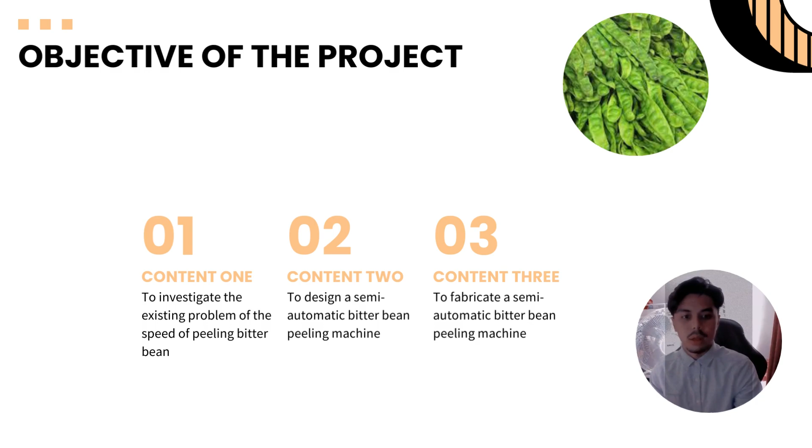The objective of this project is, first, we need to investigate the existing problem of the speed of peeling bitter bean. Second, we need to design a semi-automatic bitter bean peeling machine. And third, we need to fabricate a semi-automatic bitter bean peeling machine.

Next is the scope of the project. This project is aimed at entrepreneurs who sell bitter beans as the main production product, and the designs are created by using a solid modeling computer design program.

The third point is overall rough dimension of the product are 30 cm length, 20 cm width, and 15 cm height. The fourth point is estimated weight of the product is 3 to 5 kilogram.

The product can be used in small industrial areas or at home, and it is not suitable in watery places.

The fifth point is only one pod of bitter bean for one entry. The bitter bean must not exceed the specified width limit, which is 20 cm.

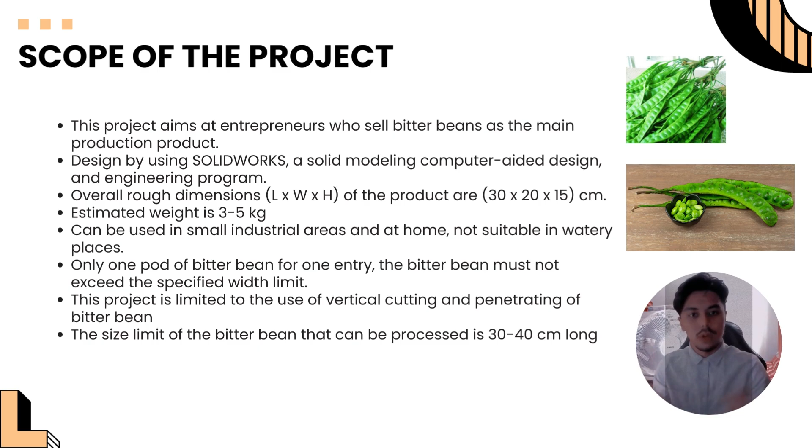This project is limited to the use of vertical cutting and penetrating of bitter beans. The last point is the size limit of the bitter bean that can be processed is 30 to 40 cm long. So the next slide is significance of study.

By researching and investigating the way small industries and common people peel the bitter bean, there are problems found, such as the way the bitter bean is peeled. Firstly, the way the bitter bean is peeled is not efficient enough as they are peeled manually by using their own hands. By using the product that we created, it is possible to shorten the time for processing of the bitter bean peeling to occur in a short time and a simple way.

Therefore, we created a new initiative, which is to create a semi-automatic tool that is able to peel off the skin of the bitter bean, to achieve our goals such as time saving in the peeling process. It is also able to save the cost of purchasing ready-to-peel bitter bean from a supplier.

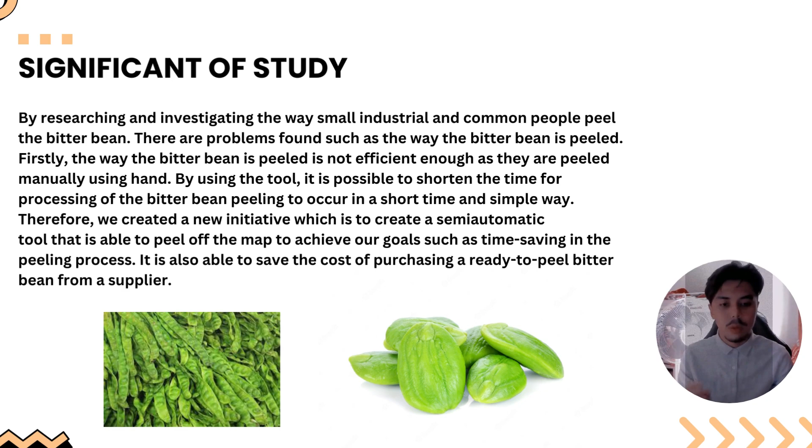Among the side dishes in Malaysia is bitter bean, or Parkia speciosa as it is scientifically known. In addition to the Parkia speciosa type, Malaysia is also home to the Parkia timoriana type of bitter bean. The filling of the bitter bean of the Parkia timoriana type is really tasty and is the second choice for cooking.

Parkia speciosa is more widely used and loved by the community in Malaysia. It serves as the base for a variety of bitter bean based dishes, including bitter bean anchovy sauce, fatty bitter bean sauce, and others. It makes it easy for those who don't have much time and are always busy at work and don't have time to prepare and buy ingredients for their own meal.

Bitter bean based food is one of the dishes offered as a ready-to-eat food product. Next, small and medium industry, or in Malay, industri kecil sederhana, also known as IKS, is a government initiative to develop rural industry in Malaysia.

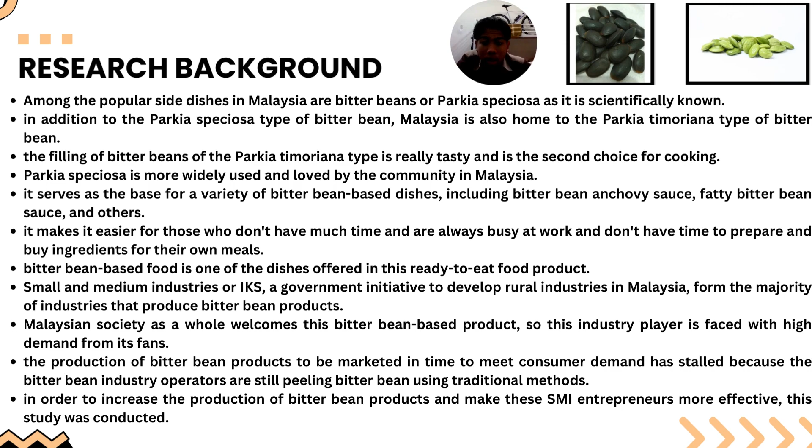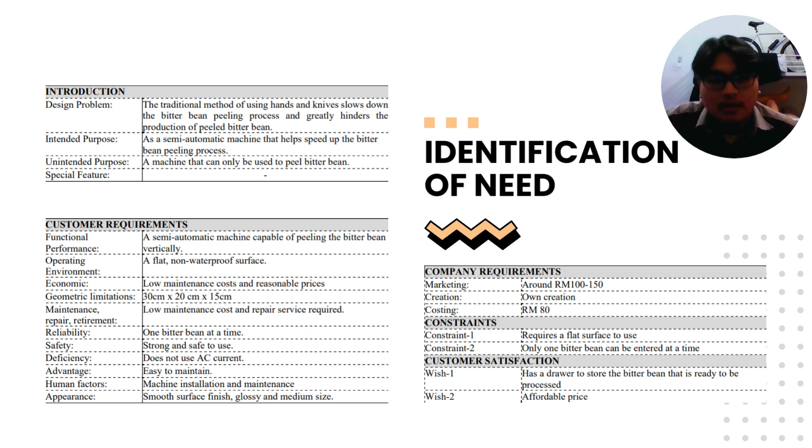Next, I will present about identification of need. Identification of need is divided into 5 parts, which is introduction, customer requirements, company requirements, constraints, and customer satisfaction.

So for conceptual design, I will explain about the decomposition of product components first. We divide our design into 5 parts, which are body, cutter, track, roller, and binder.

So for the body, we call it a frame. For the cutter, we use a solid round knife, and for the track we use stainless steel, a roller and a binder. The binder uses a screw and nuts to bind our design.

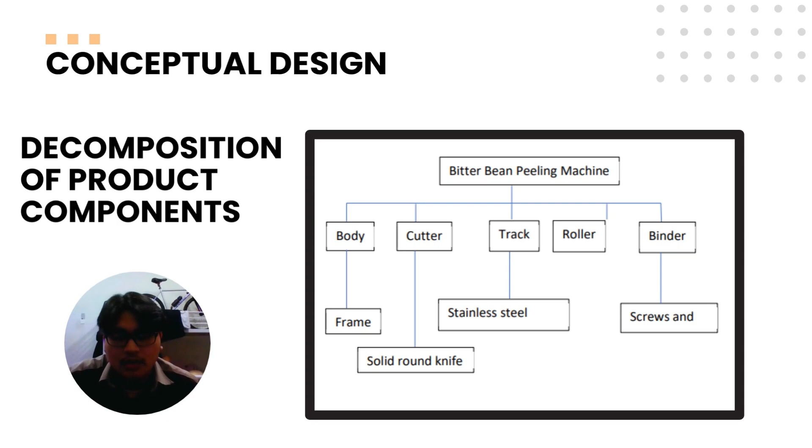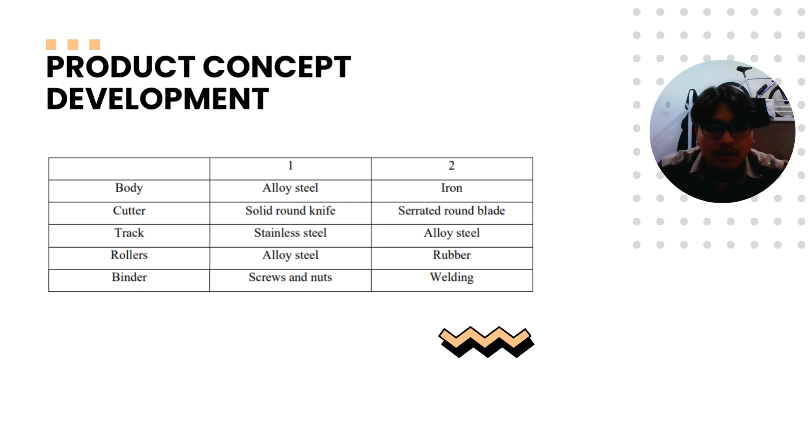For product concept development, we put 2 choices for each part. Then we calculate the probability for a suitable material for each part to complete the design of our project.

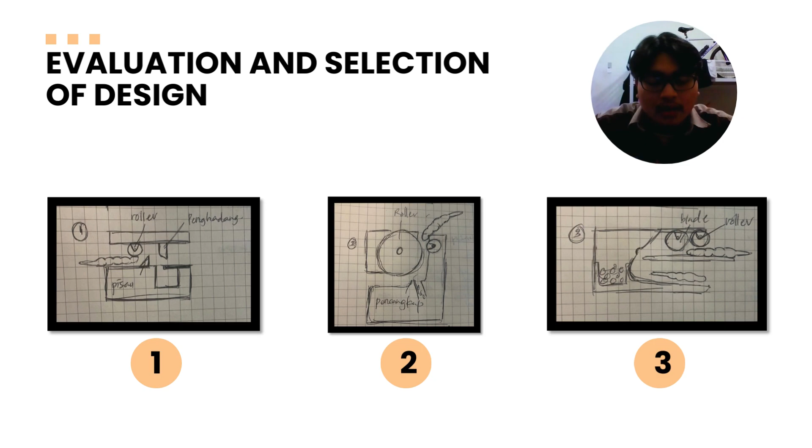There are 3 designs that we had in our evaluation of selection of design. These 3 designs are our first stage in designing. As you can see, there are different designs between the 3 of it. It is a prior design that we designed by ourselves to modify the peeling machine.

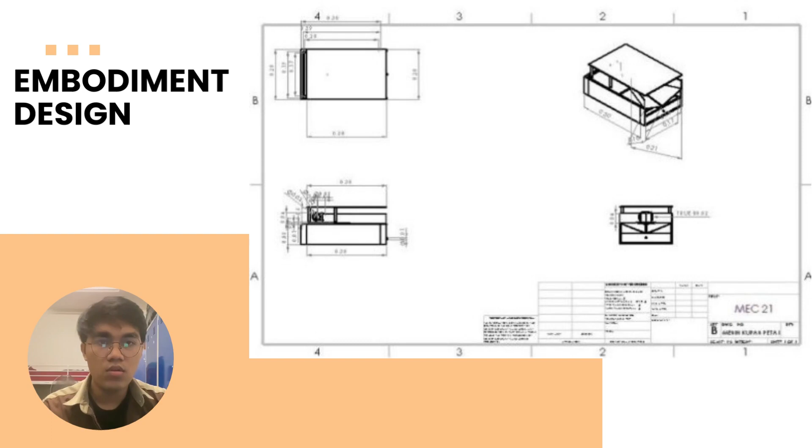The container shape is a regular shape with gross dimensions of 293 mm x 186 mm. The container will be created as a drawer in order to make it easy to get the bitter bean seed. The bitter bean path in the machine is built by placing a wall with a height of 4 cm. By this way, the bitter bean will go all the way through the path without deviating.

Next, embodiment design. The hand sketch of the design is further drawn as an engineering drawing and modeled via SolidWorks 2022. The overall dimension of the semi-automatic bitter bean peeling machine is 300 mm x 200 mm x 150 mm. The machine consists of the following major components: roller and blade. Each component is mounted to the machine surfaces.

The rollers are needed in order to push the bitter bean through the machine, while the blade is needed to cut through the bitter bean. Both the rollers and blade are connected to the motor, which is 30 millimeter diameter. The bitter bean then will be brought through the path in the machine and will be pressed by another roller before the seed falls through the inclined plane and falls into the container.

The inclined plane is trapezoidal with dimensions 190 mm x 103.38 mm x 209.20 mm x 15.83 mm, with an angle of 26.57 degrees.

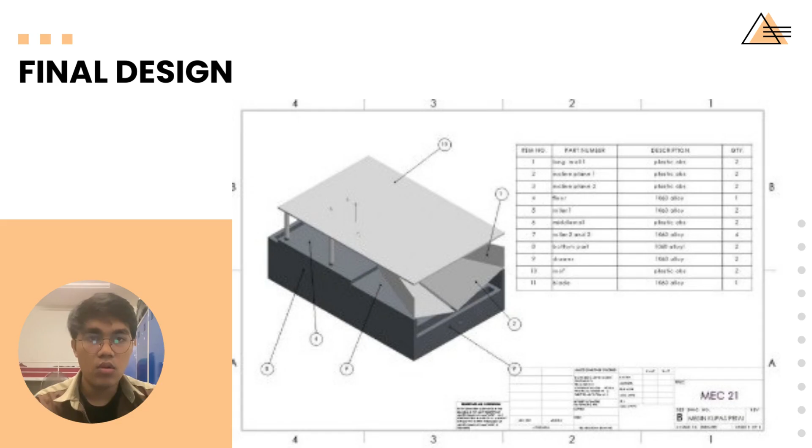The container shape is a regular shape with gross dimensions of 293 mm x 186 mm. The container will be created as a drawer in order to make it easy to get the bitter bean seed. The bitter bean path in the machine is built by placing a wall with a height of 4 cm. By this way, the bitter bean will go all the way through the path without deviating.

So the conclusion for this project is the semi-automatic bitter bean peeling machine that we created is designed to help the way of common people and small industrial processes for peeling bitter beans. This product is mainly created to help people peel bitter beans, providing a tool for faster peeling in a short time, and it also has several other benefits.

This tool that we created is an improvisation of all the self-made tools that we found on the internet. By making this tool, we hope that we can make the process of bitter bean peeling faster and safer, especially for older people who like to eat bitter beans.

After that, the fabrication process will make sure that the product lasts for a long time.